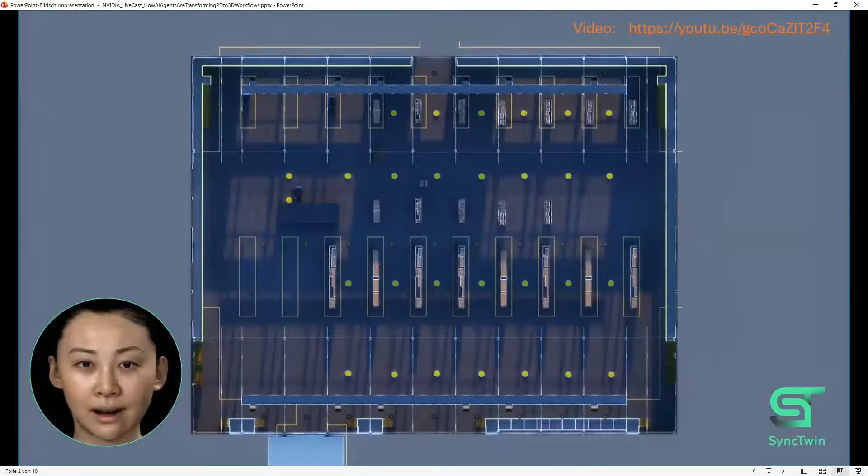Need something specific? Just ask. For example, Lucy, create a pallet rack. Or, please add forklifts and loading units. Optimize your processes with tools like NVIDIA cuOpt, streamlining operations to deliver real value from your digital twin, to make smarter and more efficient decisions. Or dive into VR and become one with your factory to understand and engage with your operations on a whole new level.

Do you like to know more about what I... Just so far, to highlight, this was 2 years ago, and now we have Nemo Claw basically doing this as an agent. So this is so cool to have now all these different tools to actually work with. And yeah, you basically build this agentic digital twin pipeline, as you said, from all the data sources available to

you. So it might be an Excel file or a Visio document or a PowerPoint, but with agents or LLMs, you can actually pull out the information and transform it into, in our case, OpenUSD in a form that everybody can consume and relate to. And this is just great to have OpenUSD here as an enabler. And let's go into our factory.

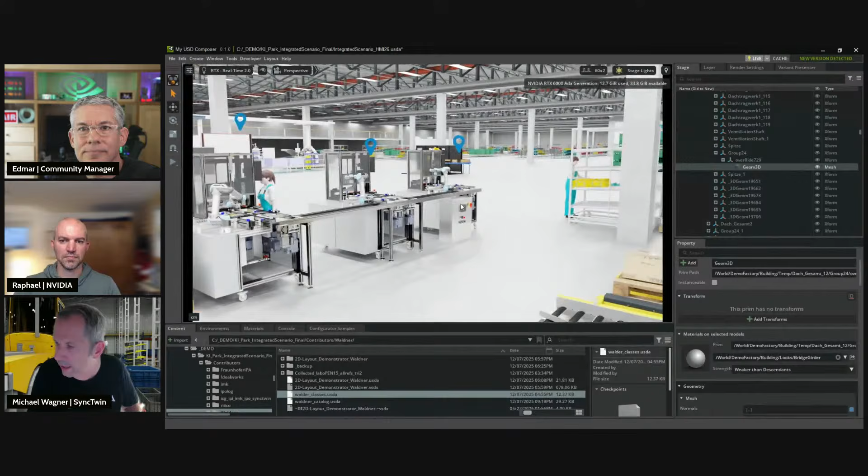Definitely. So just to show you here, for example, we have over 10 different companies providing content from their expertise. Here we have Ideal Works with their shop floor, their robot fleet, and here we have actually 3 different companies with a virtual commissioning, combining human simulation with IMK and ipolog with the material provisioning racks.

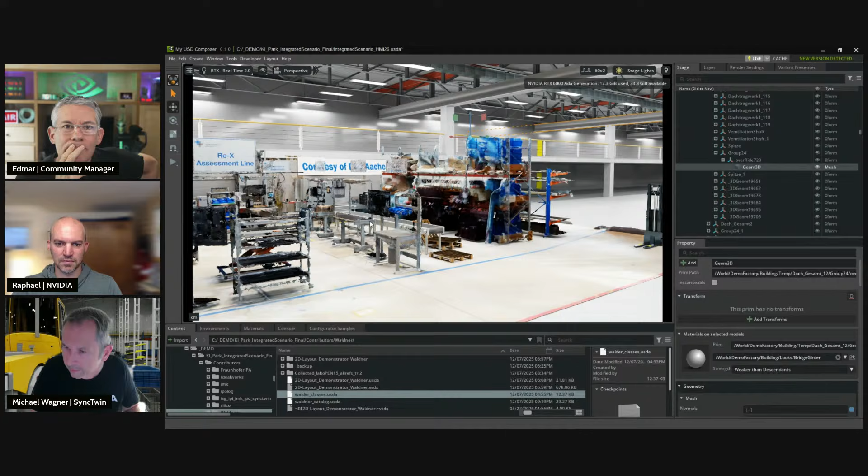And so also from scanning environments, I'll just give you a quick tour, because everything you see is also the product of an expert tool here. Rico, for example, uses an agentic approach to segment these scans and make them actually usable and augment them with meta information. So this is basically a tool table which I can move and put things on, just flying to the actual site, which is today a laboratory environment.

Here, this actually was created from a Visio block layout. I just quickly show it. The different areas here, the blue things, they come from this Visio layout, for example. This is a rough planning layout in Visio, just a 2D document tool. But we have connected this and created a little connector MCP, which is notified whenever this changes, and transforms it into an open USD component. Not only shapes, but also meta information, right? We take all the information out of this source and transfer it to the USD.

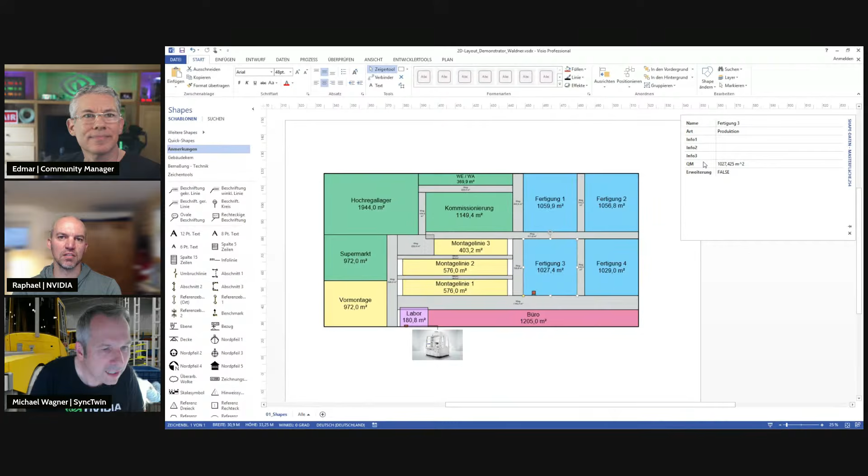Michael, how long did it take you to build this connector? Oh, that was not so hard, a few days. Yeah, because we did this years before. So now with Claude Code, it's a matter of a day or hours, I'd say.

And in the end, I'll show you a little demo. I just did it in the last hour. So yeah, you really have powerful tools if you know a little how to program on your hands right now, and it doesn't get worse. It only gets better. So times are really great to be in this space.

Because it also identifies maybe some optimization opportunities in your software to make the connector faster, or add additional features to it. So that's also something we're doing on a regular basis now, to rebuild existing solutions and optimize them at the same time with support of agents, to make them better, to make the performance faster and those things. So this is super helpful.

Yeah, and also like now when transforming - this was actually a normal kit extension, right? And we transformed it into an MCP, because it has a FastAPI interface, and you can just add this MCP server functionality, and while you're doing this, you can also look into the code and see what can be improved.

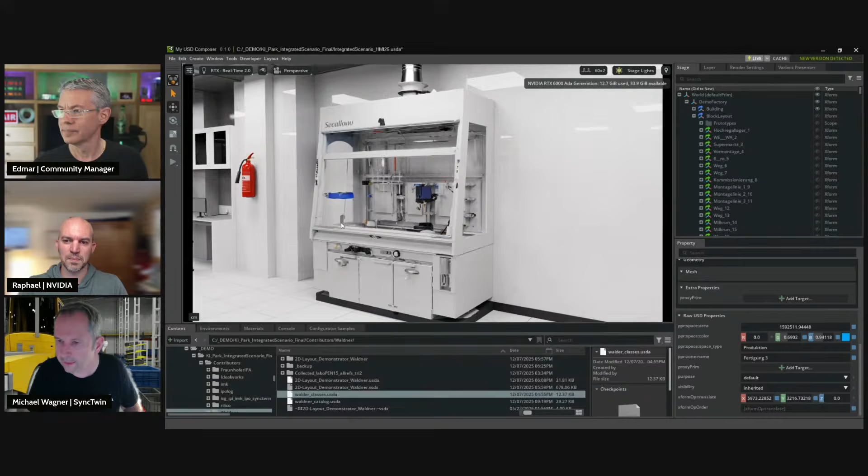And then, okay, now we have this our block layout, and I want to go now to a new area we haven't shown last year where we first presented this. It's basically a company creating equipment for laboratories. And these guys, they have a quite nice catalog as a PDF, right? And as you see here, this is a laboratory environment, and this machine has actually been created just from information in a PDF catalog document, and some picture also in the website of this catalog.

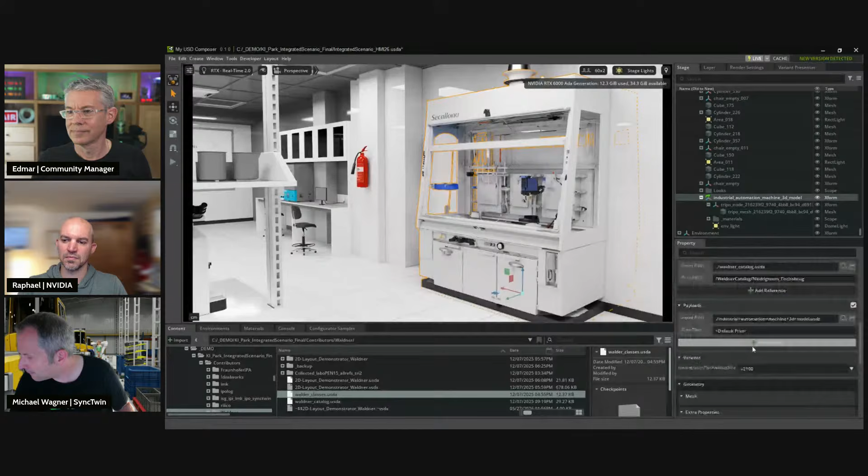And so what we do also with agentic help, we need to do two things basically. We need to understand, as you said before, not only the shape and these elements, but the semantics. We need to know this is this kind of machine, and it has this weight. It's like, that's German, but it's like some table thing for laboratory, right? I can read it - sorry, it's a German company as well.

So yeah, that's basically what you pull out from the PDF, right? And we use here Claude Code to pull out an ontology. So we create a class model of every object in this catalog. If we don't have any - some companies may have that already, so they don't need to generate it - but we can use agentic help to generate the actual class model.

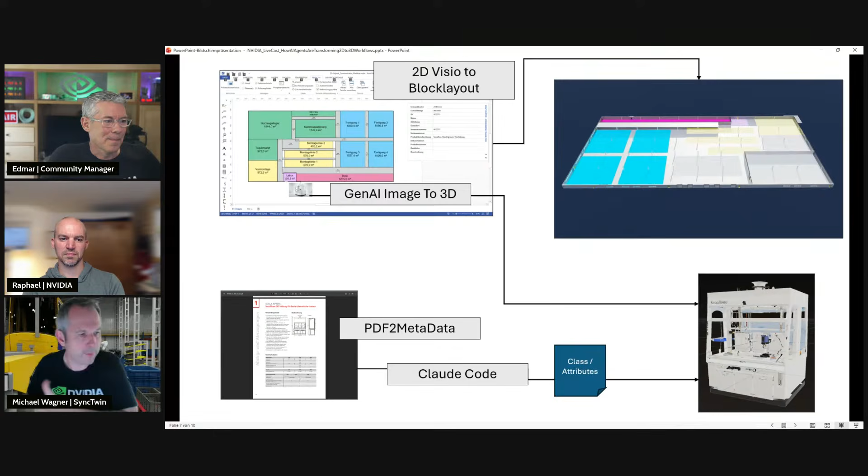So we have tables, and we have other equipment. The tables are in this and this and this size, and they're for chemicals, or this is with wood, and everything is then created in these classes, and that's some attribute of OpenUSD. You can work with inheritance. So just let me quickly show how this actually looks.

That's such a great example, because I mean, imagine how many people are facing those challenges to only have some 2D images or some catalogs with some measurements and a table of specifications, but you need the 3D data, the 3D model in your digital twin to do some collision checks, to do some what-if scenarios, to look - does it fit into my layout planning, or what happens if I change the layout in Visio?

You will see immediately the impact, or how many machines can I place in this lab, and this opens up so many new opportunities, how to work with the data, or how to migrate or upscale those legacy data in PDF, in Excel, in PowerPoint, in Visio. I mean, I can go on. This is a really great example.

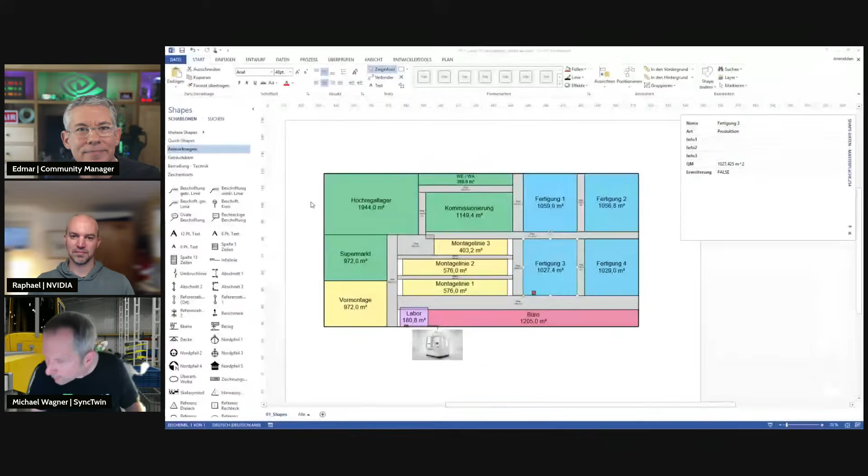By combining these different sources, so in Visio, I have just defined - you see the little, if I zoom in, I just defined the spot where we want to place this machine, right? And so by just telling this, it's this kind of a product, we already have a spatial relation. And then we augmented this with the information from the catalog, and from this PDF to USD catalog, we have derived basically these classes, right?

It's OpenUSD, and the good thing about OpenUSD is it's also ASCII - you can read it, right? And so this is what the agent came up with, the actual class structure. So we have a class product, which has these kind of attributes. We have a class media connector with these attributes.

And that's just by looking and working through the actual information in the catalog PDF, right? And then we say, okay, we have this class Abzug, which is a product, and it has additionally these kind of attributes, right? And we have another class, or it basically generated these class definitions from

PDF to OpenUSD. And then if we have this, we can actually use this and create a catalog in OpenUSD, right, which uses the classes. And here is the concrete catalog entry, and we have used one element of this catalog to actually put into our factory.

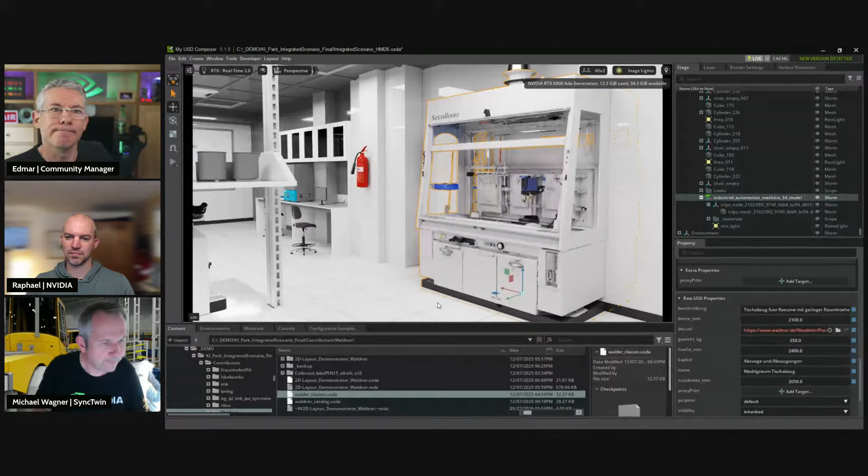And so now the question is, how can we actually get the 3D model? So now we just had the data attributes, and that's something where we have several possibilities. So in this case, I used a 2D image to 3D Gen AI provider. I also did different tests with 2D to 3D Gen AI, but this was, I guess, Tripo.

And the agent calls the MCP, basically calls the web interface of these generators. So now we get a nice 3D representation. See here it's Tripo, as I said, and we augmented this also into this OpenUSD structure.

So that's very important, that you have this hierarchy and this namespace, and you integrate everything, and the different aspects of this digital twin come together step by step, using different tools, using different agents, which are actually either triggered by yourself, and Raphael showed the

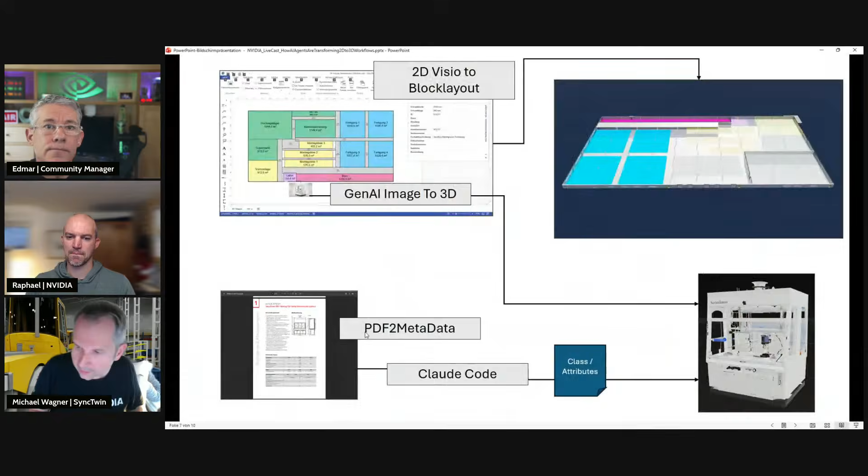example here. That would be the other thing to get 3D data or a 3D model. So we have our NemoClaw Telegram bot, right? And we go to the factory and take some pictures. Here, for example, we need a picture from the front and a picture from the back, and we actually create a 3D model of the machine and can then integrate them.

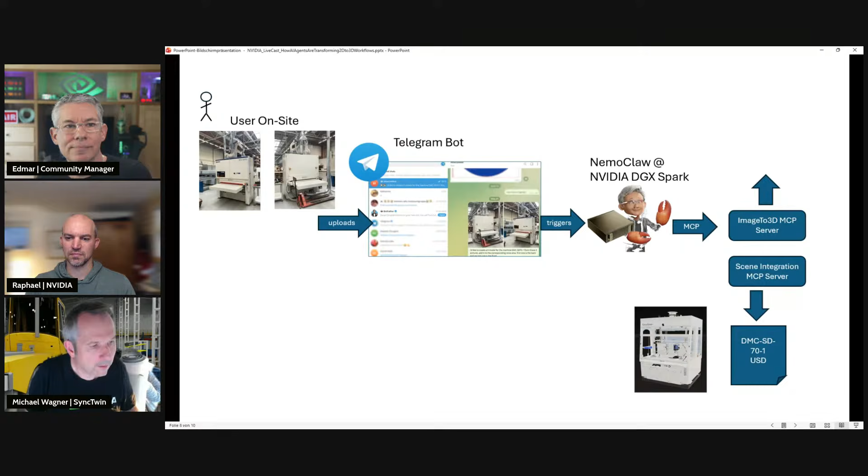And from this approach there will come a lot of different new capabilities or skills of these libraries in the Omniverse ecosystem. NuRec, for example, is already a tool which enables these kind of workflows, and so I think getting the real environment into the space is getting better and better.

And maybe to give you a whole overview about how we think things will develop. As I said before, we have a digital twin asset pipeline in the center, right, based on OpenUSD, working with different process or physics simulation engines in the ecosystem, expert tools, and we have a lot of agents interacting with this digital twin asset in the middle, also acquiring real world data.

And the user actually works by interacting with the agents, right? Especially an orchestration agent like NemoClaw, but also generating just the user interface for the job.

So this is something I also want to show next. How now we have our 3D data, we want to integrate something, a little tool which is missing. How can we leverage the libraries and the skills from OVRTX, for example, to create a tool which we can use as a user, or our agents as an MCP can also use.

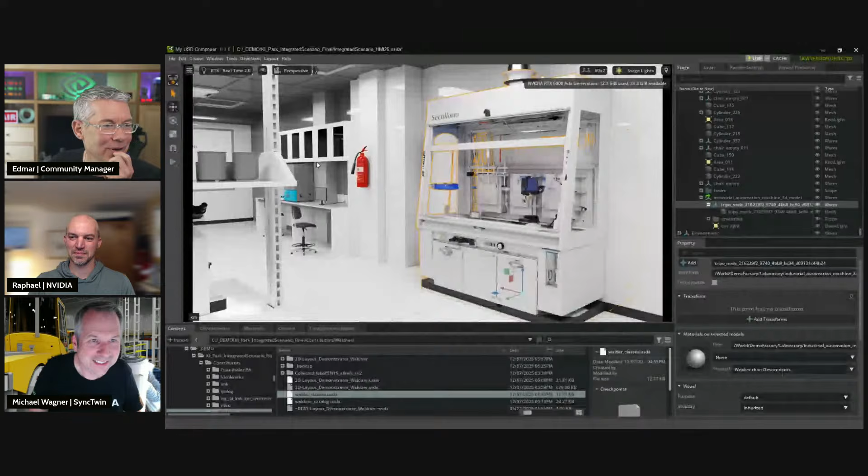Very cool. A lot of interesting comments and excitement in the chat. I didn't want to interrupt, but a lot of people were surprised that you can do this type of workflow right now. I think it's super inspiring. I posted some links in the chat for people who heard Michael mention NuRec a few minutes ago, also for Omniverse libraries, which I think he'll show us in a bit. One question though, Michael, people really loved the fly through, and we're curious - it was so smooth. What is your hardware you're using right now? What GPU is this?

Oh, it's an RTX 6000. It's a nice one. So obviously it looks like this. Look at that, it's like a mirror. A great GPU, and obviously the more powerful the GPU, the smoother this would be for you.

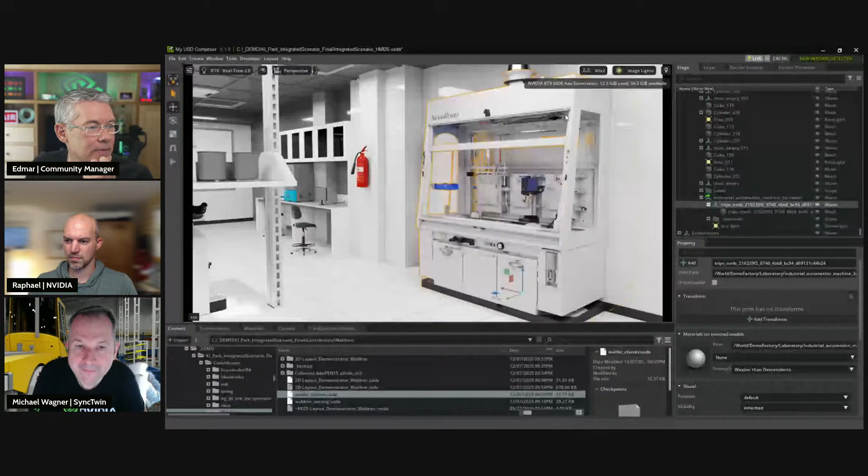There was a question here, let me see if I can find it really quick. Oh, here it is: how important is standardization, like MCP, in enabling a scalable multi-agent ecosystem?

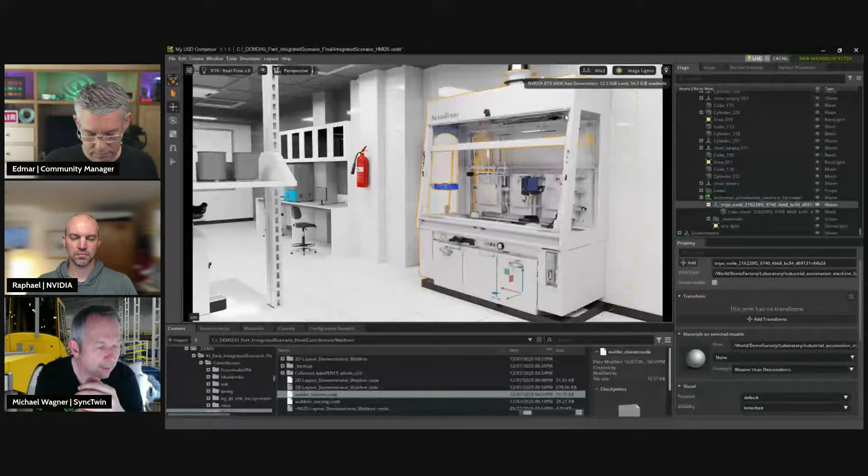Yeah, very, very important - and not only MCP, but on the OpenUSD level. That's what the Alliance for OpenUSD is about. The SimReady standard, for example, is also an important thing. You have to agree on something if you want to address a certain aspect of the digital twin, on the attributes and on the behavior, and what should be included for a certain use case. There are a lot of things coming with the SimReady specification, because validation is an important topic - you want to validate what your agent is producing. That's the same for coding as well. That's what brought me to adopting a more test-driven development approach, because you really have to be sure that what the agent produces is what you actually want. You can do that by defining the tests first, which should be validated to make sure the code does what it should do. But also you have to validate the USD structures which come out of these agents, that they contain and look like what's actually correct for the certain use case.

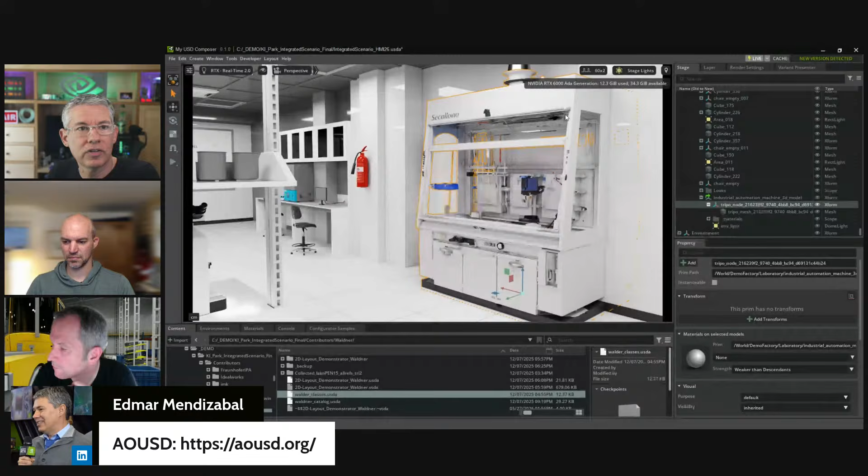Very helpful. I did put the link for the AOUSD in the chat if people want to find out more - very easy to remember, AOUSD.org. If you or your company wants to get more involved, they're always interested in having more feedback and input from industry. So I highly encourage that.

Very cool. Dylan Tobin, Omniverse Ambassador, is saying we need a USD asset benchmark. Yeah, so it's definitely an evolving thing. I think get more involved - AOUSD has actually a pretty popular forum, I believe, where people can also discuss the future of AOUSD.

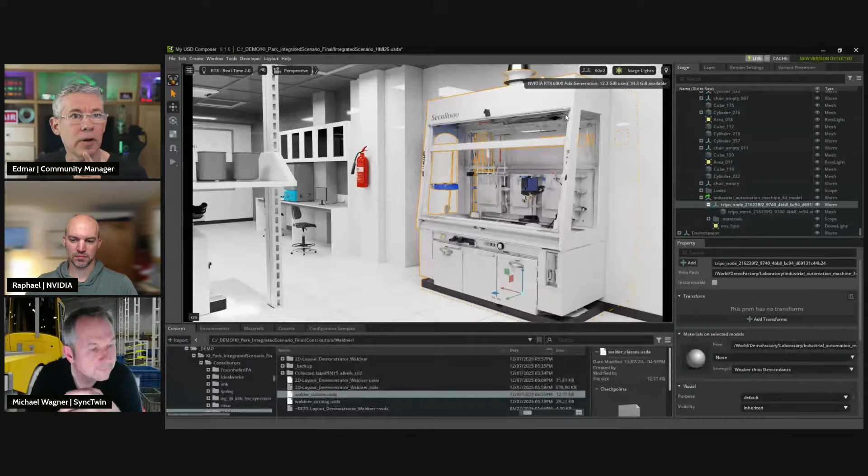This question came up a little earlier, and actually Paul had to go - he didn't want to interrupt but he did wave. He had another meeting, but he had called out this question early in the live stream. Maybe we can talk about this for a minute: besides training robots, would these digital twins be useful for other types of simulations, like discrete event simulation? You bet, yeah, definitely.

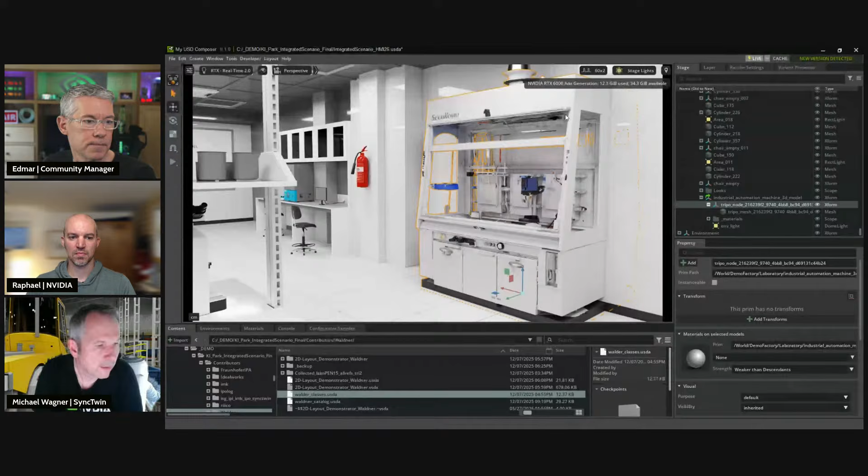It provides the common ground, you put the different expert tools, and discrete event simulation is also like an expert tool, and from my point of view, providing this simulation type, you derive some KPIs from it. You have plant simulation, visual components, and these guys have connectors, and they need also a scenario to work on. So OpenUSD makes this a lot easier to actually get started.

We have a good question here, I think it's relating to the model we're looking at on the screen now. Is this specific model mesh or CAD style? That's mesh, yeah. Mesh. There you go.

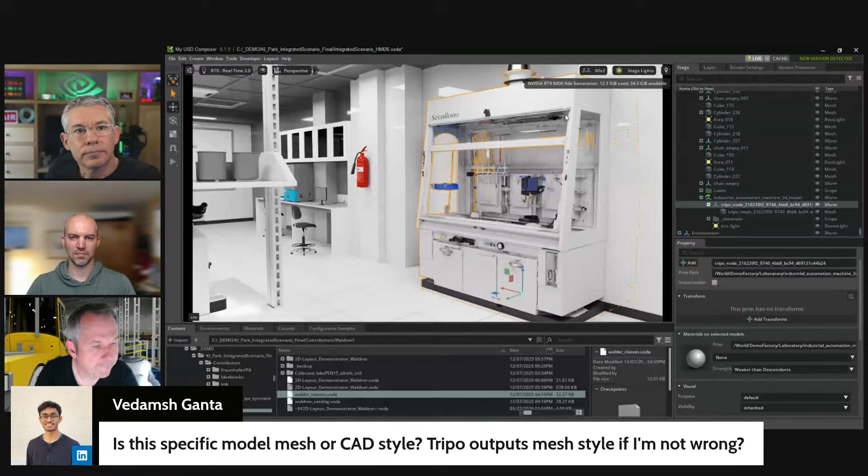But it's super accurate. Can you zoom in a little bit to show what LOD level we are talking about? It's not that bad, it's just from one picture, so that's really crazy. Not too bad, yeah, not that bad.

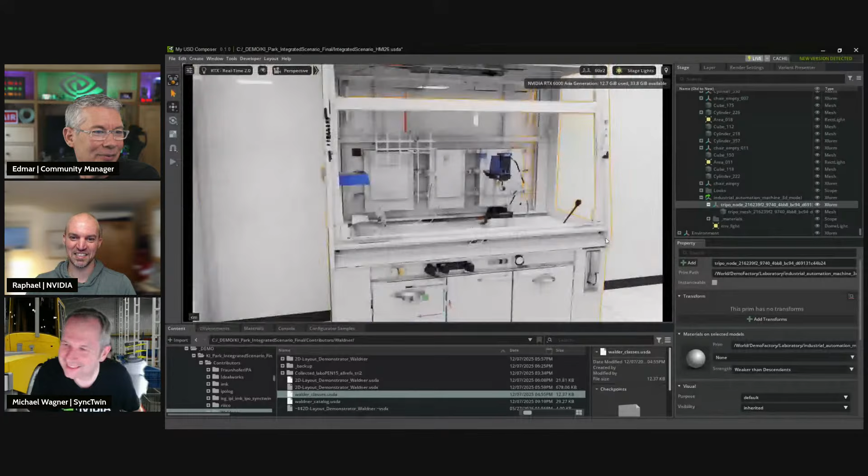It's amazing. And then we have a really nice user here watching who was kind enough to post in English and German, I think. Nice. Which model has been used to generate the 3D object?

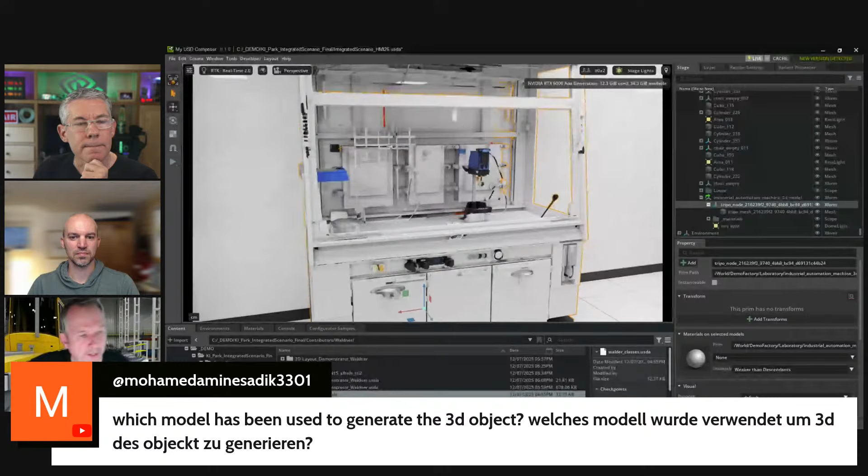So you were using Tripo Studio, right? But I actually created a benchmark where I used all the different models, I have to look up the link and compare them. And the quality gets better and better and better. So we have all the different, there is like... I don't remember, I have to look it up. Yeah, that's a lot of different tools.

Very cool, okay, very nice. Let me see, and was there anything else in this you wanted to show? Did you want to dive into those?

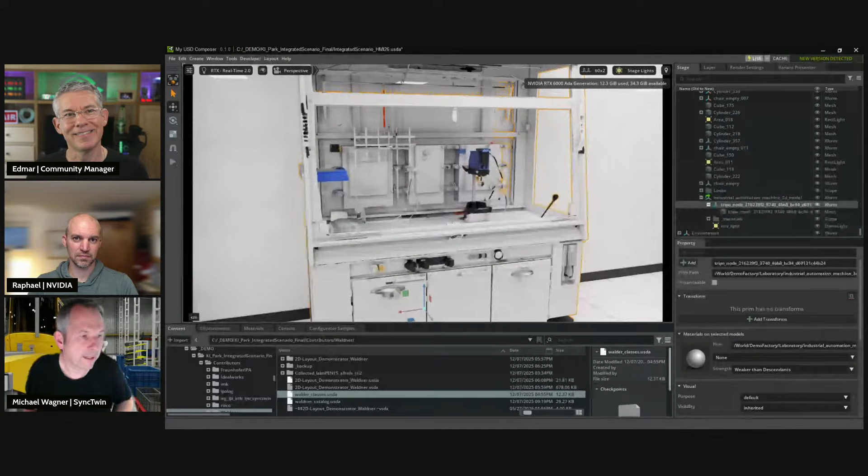Last thing, I just wanted to show, now we have our 3D environment, right, and we have generated 3D elements, but for some use cases we need to get 2D from 3D. So because we have to use a Visio, maybe we want to get back, or some presentation we want to have the top view. So I thought, why not let's create a little tool for that, and use what we have with the OVRTX library, which was released recently. I'm going to switch to the other laptop if that works.

Yeah, let me see, let me know when you have it ready and I'll share it. I think I see it. Let me take away this one and add this one. I think we're looking at your laptop now. Yeah.

So basically, what I used Claude Code for this, I described I want to have a little MCP server which can make 2D out of 3D. And I've got this, and this is already the result. It's Claude desktop in this case, and it's using my MCP, which I just created, to create these 2D top views of a USD element.

Let's see, I just started with the OVRTX library, and maybe for you guys that's really helpful. So this is the OVRTX, you can download it from the GitHub repository, and it comes with skills, and that's really a superpower because it gives your agent the knowledge how to do certain things.

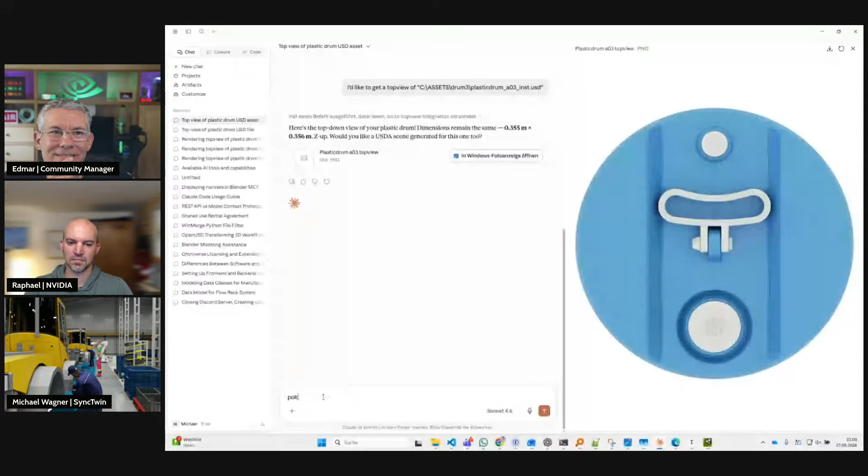And we can also then ask to create a floor plan element in OpenUSD, which represents this top view. Just quickly, okay, let's create a USDA from this, right? And it uses the other method we created with this MCP. Okay, already done. It created this top view. So here is the top view it just created, right?

Let's take this and add it to our scene and see. Oh, look at that. So it actually created this 2D top view element as a USD. And then you can use this, for example, in a floor plan or in a 2D environment again. And so we have closed the loop from 2D to 3D to 2D. So very cool. Within minutes, right?

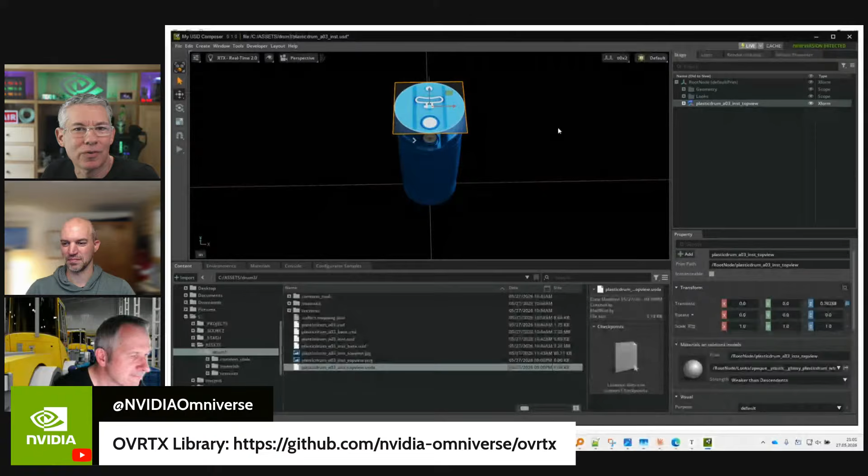I have a good question here from community champion and popular Discord user Papa Chuck, otherwise known as Renan. So what is the sequence of steps? You start using the agent, then you provide the skills, then you told it to build a tool with OVRTX. Is that the right flow? Yeah. Well, I started with the repository.

Added Claude Code, and Claude Code uses the skills provided with the repository, and I created the actual service, which is a FastAPI service using the OVRTX renderer. And then I additionally created the MCP server for that. There are basically two functionalities: rendering the 2D and creating this mesh from the 2D. And with that, I also created a specification. It's a JSON file describing this MCP server for Claude Desktop in this case.

Could do it also with NemoClaw or whatever, right? And that integrated this MCP into Claude Desktop, and then Claude Desktop can ask, because it's MCP, it's a protocol: what can you do? And then it basically just calls the correct functionality.

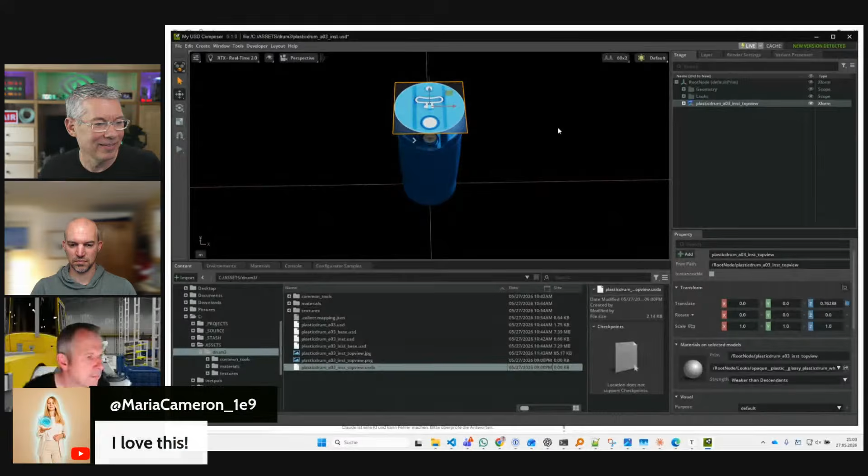Absolutely amazing. Look at this. I love this coming in from YouTube. Dylan, also awesome. And a little earlier while you were working, Omniverse Ambassador Pekka Varis said Wagner's on fire. Then a quick reply to that: he is beyond fire. Michael, I think you've impressed a lot of people today, including myself. We just got a last minute question before we head to the news. This is coming from LinkedIn.

Are there also possibilities for special shadings? What kind of shadings do you mean? Maybe textures, or apply materials. Yeah, sure. Also interesting, you can add physical properties. It's also kind of shading if you want.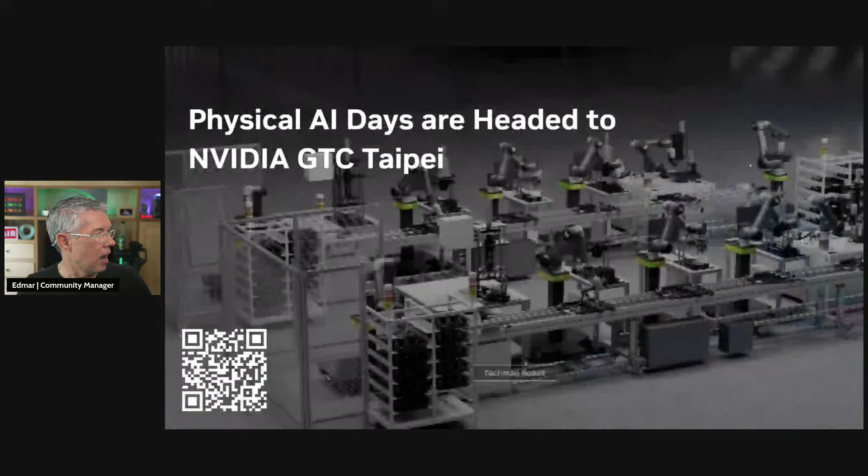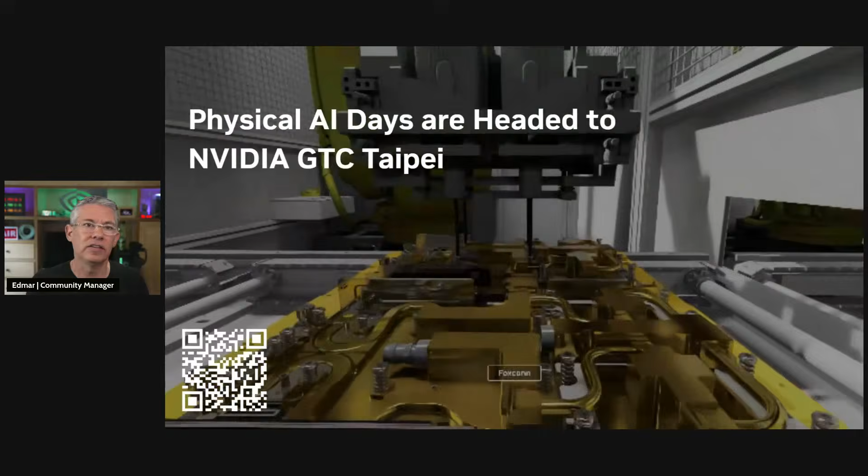We're going to have physical AI days at GTC Taipei. These are curated sessions specifically around physical AI. That QR code will show you more information. The great thing about these GTC events is that we put that content out there for everybody else in the world who couldn't make that event literally within hours after the event happened, usually within a day or two, or sometimes maybe within the first week. But most of the content's there very shortly after GTC concludes.